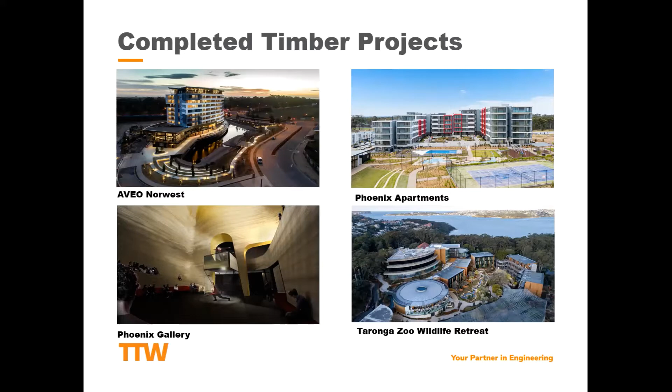So just today, I want to give you a bit of an overview of the building, and as Andrew said, just an introduction to the project itself. The people who worked on this building were myself, who did a lot of the day-to-day design, Raj, one of our senior engineers who also worked on it, and our director Kevin, who basically oversaw the building.

So this is what it looks like now. This was actually completed in 2019, basically last year. It's the second phase of a new development over in Rouse Hill, called Parkland Estate. The first stage was a townhouse development, and the final stage includes a new building called Lotus. We were engaged by Strongbuild as the D&C structural engineer for the project, originally brought on in 2015.

The project is located in Rouse Hill. For those of you who don't know Sydney, it's located to the northwest of the CBD, in a fairly rapidly developing area. The location is actually at the end of the new metro line, near Tallawong Station, for those of you aware. That's basically why it was constructed around there, to align with the new metro.

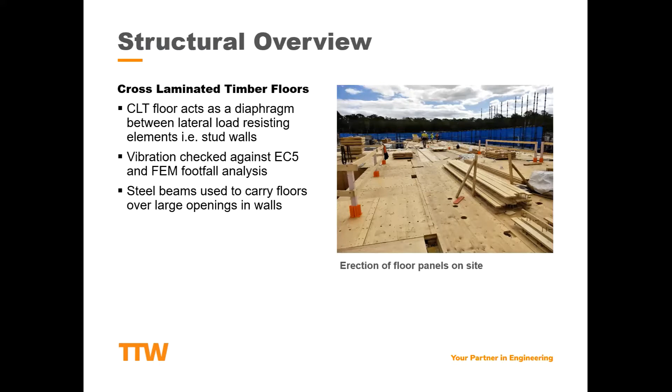So they consist of LVL stud, and the reason for this is to allow it to achieve a greater height than what you could construct out of MGP10. It also allowed us to basically pre-make all of the walls within the factory, and they would put a lot of the services in there. They then cover it with OSB or plywood, and then plasterboard line the whole thing to try and fire protect it. So once they brought it over to site, they could just basically sit it into place and move on to the next section, making it nice and quick and easy.

We use clusters of studs at the ends of the walls to carry concentrated loads, say over where there were lintels or steel beams for openings. The reason for this was just to try and make it as simple as possible, really, and to integrate that within the wall structure.

So as I mentioned, the walls were actually the main lateral load resisting element within this building. So obviously when you have a lateral force, you generate tension and compression loads within the ends of the wall. So we had grouped studs at each end to basically take out the compression force, and then the tension reaction was resolved using this proprietary tie-down rod system developed by Simpson Strong Tie.

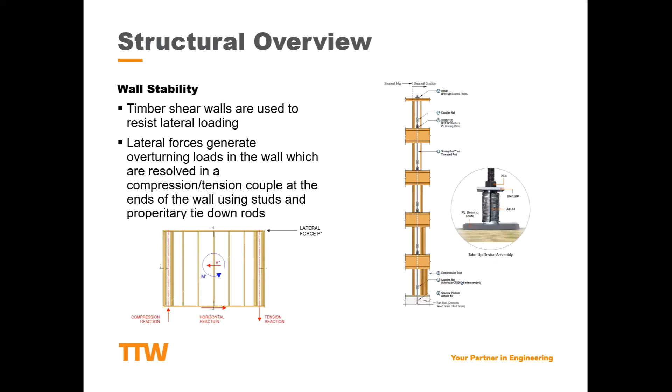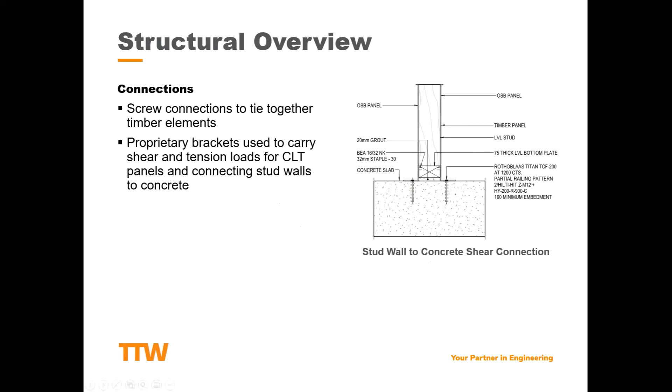There was obviously a lot of connections within this building to try and tie everything together. The connections consisted mostly of proprietary bracketry supplied by Rothoblaas, as well as a great deal of screws, which basically held everything together. We were using that to tie floors into walls and walls into other walls and so on. And then we had these shear brackets at the bottom of the walls to try and take out the shear load from lateral forces.

So when we designed the walls, obviously you have wind loading, so we had to check these stud walls for lateral deflection under service wind cases. And then under seismic, we had to ensure that there was enough ductility within the system to allow for our overstrength mechanism, so that our load hierarchy was actually properly fulfilled.

So what we actually did for this one is Strongbuild wanted to use a series of staples to build their walls. So we actually had some tests done by UNSW to verify the capacity of the walls as well as the ductility performance, which I'll touch on a little bit later.

The things we needed to consider, obviously it being a timber building, were durability. One of the major issues is termite damage, so a lot of the stud walls were actually treated internally to protect from that. They also covered it in plasterboard lining, which ensured it would be protected under a fire scenario as well.

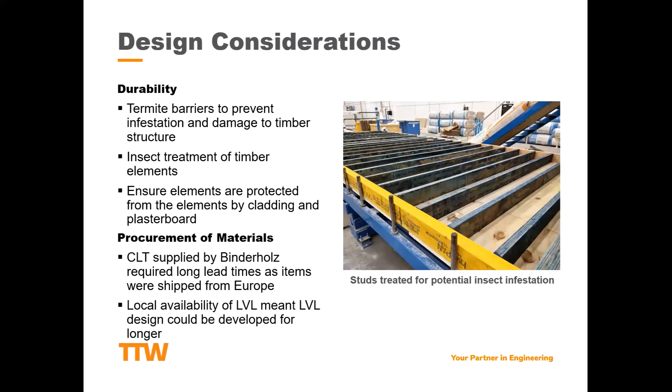For materials, the CLT was provided by Binderholz and came from Europe. This meant we needed to lock down the CLT design a lot earlier so it could be shop drawn and shipped out from Europe in time. The LVL was locally available, which meant we could take more time to refine the wall design and make sure it was as optimal as possible.

There were obviously buildability concerns. We tried to minimize the change in floor thicknesses, because this would simplify the detailing and junctions between floor panels. So we basically stuck to 3 sizes: 100, 160, and 180 thick floors. 100 was generally used within the corridors, 160 was used for most of the floors, and where we had higher loading or excessive spans, a thicker panel was used instead.

There were a lot of standard connections and lots of screws and bracketry, which were there just to simplify a lot of the on-site connections and make it as easy as possible to put together.

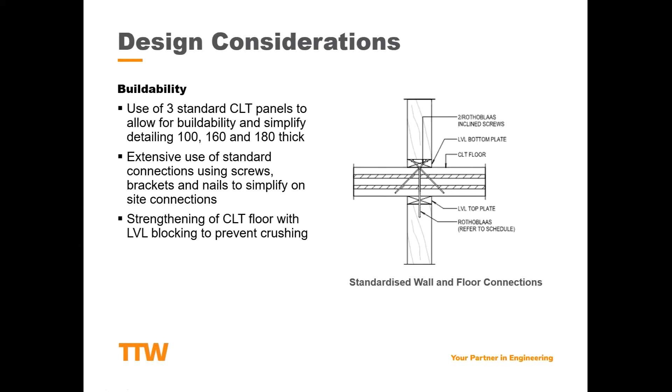Some areas where we had clusters of studs were a concern, because this is a platform construction, and the floor goes through the walls. There are issues where, with a huge amount of studs carrying say a steel beam at the end of a wall or a large opening, you might have a cluster of 3 or 4 studs sitting next to each other, creating a very large crushing force on the floor. So in some sections of the CLT floor we reinforced it by cutting a block out of the CLT and inserting an LVL piece, which I think Andrew will mention later had an influence on the axial movement.

As it was a panelized wall system, we had to allow for the manufacturing process, ensuring there's enough tolerance so that when building these in the factory, they can match what the machines are capable of in terms of staple placement tolerance and material thickness.

Because it was prefabricated, the panels could be pre-finished in the factory, meaning minimal on-site work—you don't need someone walking around on site erecting or stapling plasterboard. The other advantage was that they didn't need a lot of noggings in the wall, because the sheathing was already on the wall, providing stability for transportation and erection purposes.

We needed to inspect a lot of these walls, so we did many visits to the factory to make sure they were being manufactured properly—checking that staple spacing was correct, that staples weren't overdriven within the OSB itself, and just making sure everything came together properly with no strange surprises.

From a fire point of view, we considered AS 1720 Part 4, which addresses charring on cross sections. Generally, we used plasterboard to protect the timber stud walls under a fire scenario, with 2 layers on each side of every stud wall to protect it for the full 90-minute duration. For the CLT, we also used plasterboard in a tested system done by CSIRO, combining plasterboard lining and charring to achieve the full 90-minute duration.

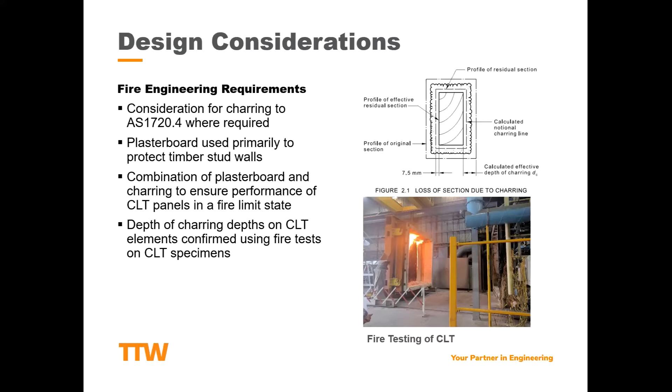So for axial shortening, which is what Andrew will mostly be talking about, we had to determine things like the facade gaps and, when they installed services, that there wasn't too much differential movement between everything, making sure we weren't going to cause issues with the facade because the building has started to move and the gaps in the facade are not capable of tolerating that kind of movement.

We generally left a bit of space at the top and bottom of the walls to prevent the OSB from shortening and being loaded up directly when you stick the CLT on top. That's because when we place the OSB and plywood onto the wall in the factory, there's no load onto the wall. So when we then load up the wall on site, we don't want a situation where the plywood is potentially taking some of that vertical load.

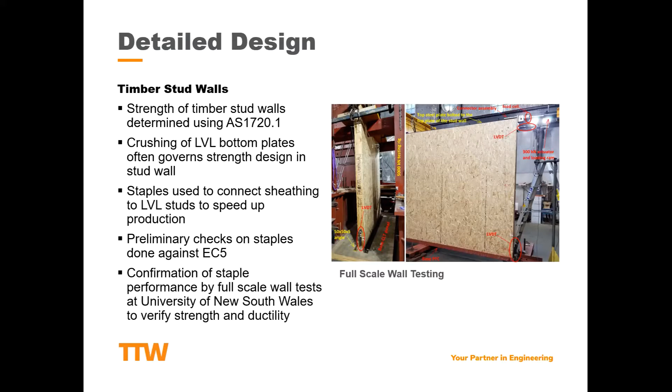So we did some prelim checks on the staples against Eurocode 5, and then the capacity of the staples was confirmed by full-scale wall testing done by the University of New South Wales, just to verify the strength and ductility assumptions we had made, to ensure that when we were allowing our seismic loads to be reduced assuming ductility, the system actually had the ductility we were assuming, and we weren't potentially under-designing things.

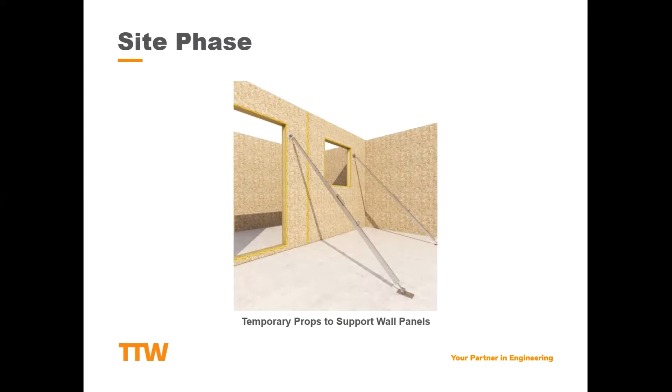So from the site phase, things were sort of straightforward. A lot of the floors and walls came to site pretty much all pre-done, prefabbed. They had temporary props to support the walls until they got the next floor on, and then obviously they take those props, put them onto the next floor, and just cycle them through each floor.

So one of the main things we learnt throughout this process was just making sure that we allow for manufacturing needs early in the design approach. This was things like standardizing the stud wall sizing, so that when they're trying to build a wall, they're not having to pick lots of different studs out of a lineup. So trying to simplify everything and make it as uniform as possible, and also allowing for consideration of manufacturing tolerances, so that if there are issues with installing studs and so on, we don't have problems there.

The edge distance requirements for the sheathing, so the OSB and the plywood, was critical. We had to make sure the plates were thick enough, and that when they installed the staples there was enough edge distance for that to still work. What we found generally was that it was more practical to utilize more material to get better, more practical details, and this actually led to a better design approach.

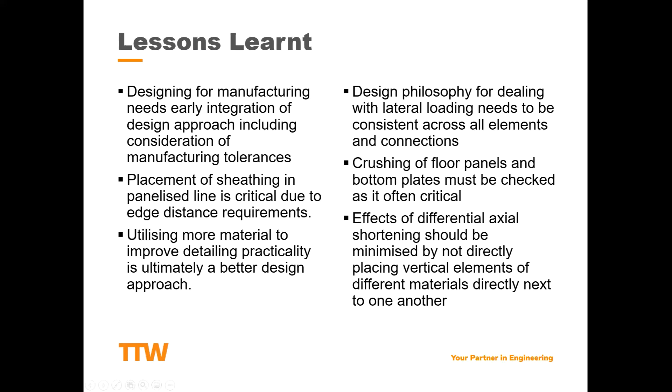So that's pretty much everything from my end. So Andrew, if you want to take back over and start your bit.

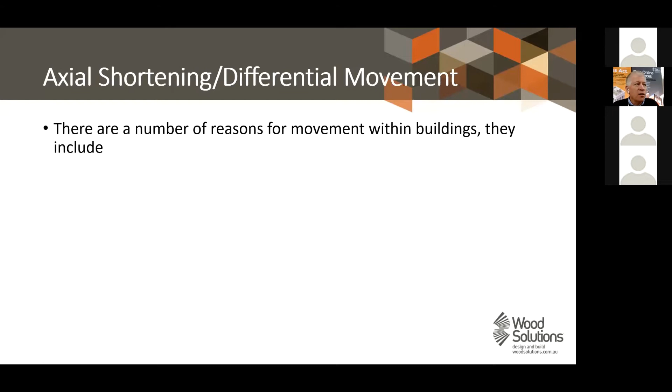So why did we monitor a building? There's a number of reasons, and the main one is what Simi's already alluded to, that the axial shortening differential movement was a key consideration, and as you saw, it was to govern the sizing of elements in the building. So what causes movement within buildings?

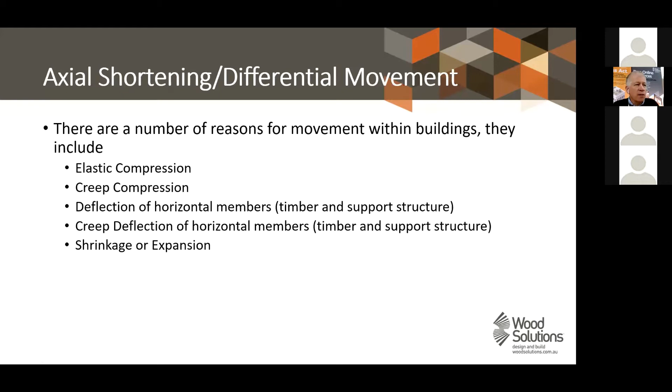There's elastic compression, creep compression, deflection of horizontal members, both the timber and support structure, and creep deflection of those horizontal members, again timber and support structure, and shrinkage and expansion. So as engineers, we need to get an understanding of how much that occurs.

Just a reminder, this is just a common thing for all building materials. Most of those actions, other than probably shrinkage, is common to all building materials. So for timber systems used in mid-rise buildings, this is a relatively new concept in Australia.

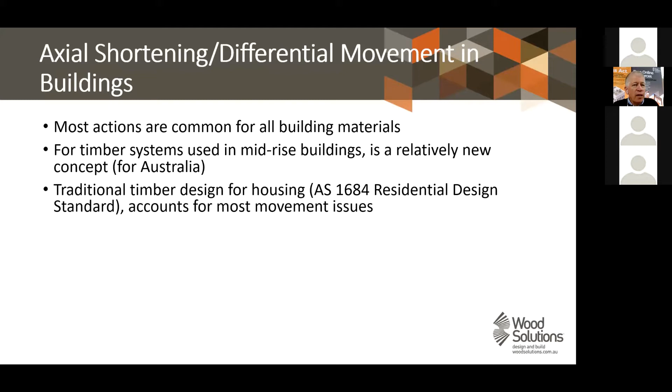Traditionally, timber design for houses, which is governed by the Australian Standards AS 1684, most of those things are accounted for within the code. But mid-rise timber buildings, particularly timber frame, is nothing new.

It's been used in North America and Europe for a long period of time, and they've generally got around these issues. But for Australia, our climatic conditions and timber species are different, and it was a bit of a consideration - are we going to get the same type of results?

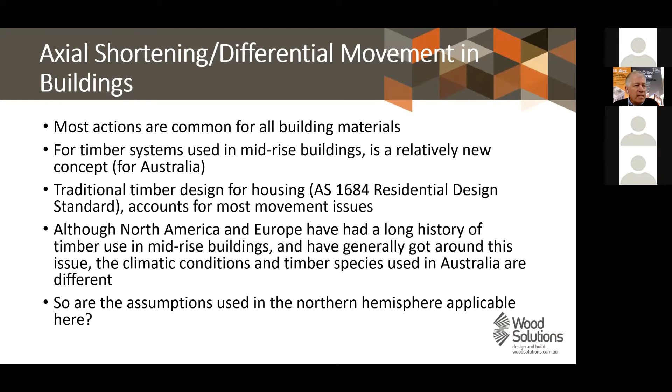So what we're trying to do is probably validate some of the assumptions that the Northern Hemisphere would use and see if it's applicable here. And to also input into wood solutions guide number 50, which is a mid-rise timber building structural engineers guide. And in that guide, there was a need to make some assumptions.

So we have calculation methods, which I'll talk about very shortly, and there's obviously assumptions that go with it. These calculations rely on assumptions that were relatively untested in the Australian context, and that was the reason why we needed to get some real data against this.

So settlement of building components - there's quite common things such as closure of joints, and there's a picture of an overseas building here, and you can see there's quite loose gaps between the elements, and when you just imagine you put more load in the building, they'll close up.

Also the deflection of the support structure. In this case, is the actual project at Rouse Hill, and you can just imagine there's a fair bit of gaps because of the deflection in the concrete slab.

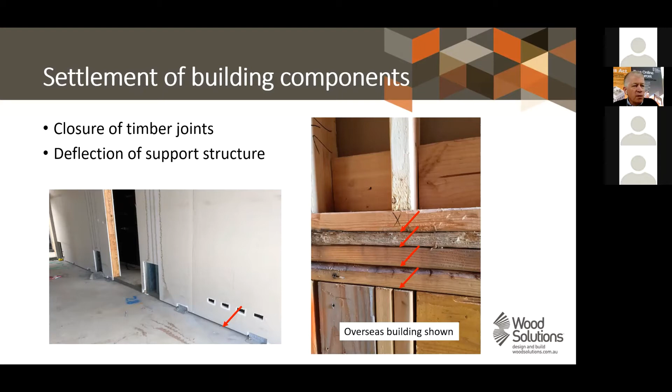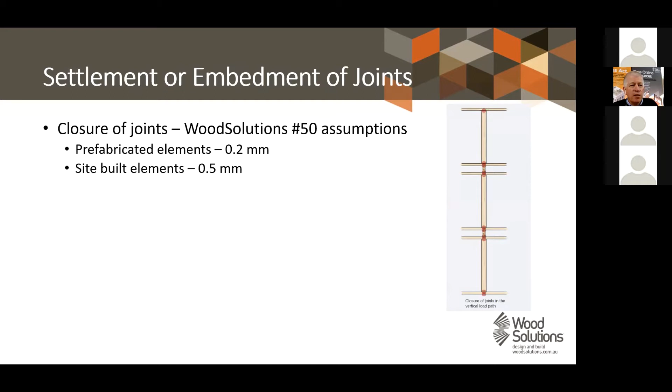So in the wood solution guides, we assume for prefabricated elements 0.2 millimeters, and for site built elements 0.5. And you can see on the picture on your right, there's a number of opportunities for gaps to occur in timber frame buildings, and imagine this over 6 stories. So you add those up.

So there's an equation there in the guide, and I won't go into detail what that is. But just to remind you that the substructure, you calculate it for its normal calculation means, but remember they generally have greater spans and therefore more deflection, and there's also creep.

So you can account for some of that deflection by packing the underside with grout between the wall and the slab, but you'll get creep occurring as well.

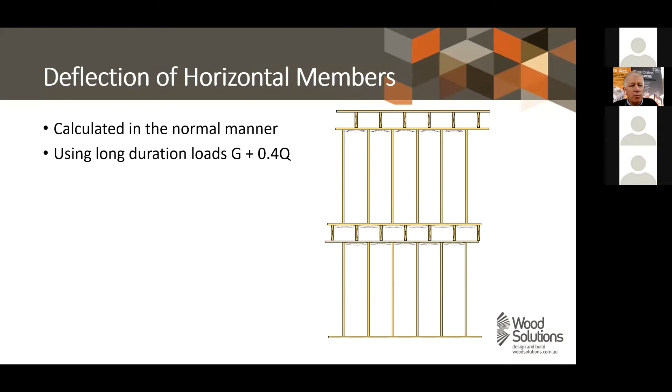So calculation of timber deflection in horizontal elements, pretty much normal manner here, just using the appropriate load case. So they can be reduced by aligning studs in the wall frame, so they transfer through, so there isn't any parts to deflect, or use a whole type of framing technique called balloon framing.

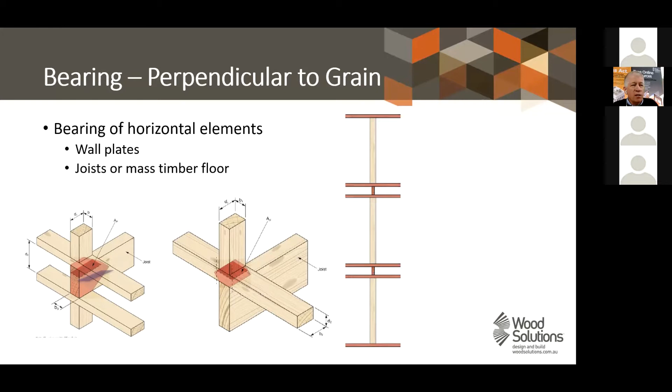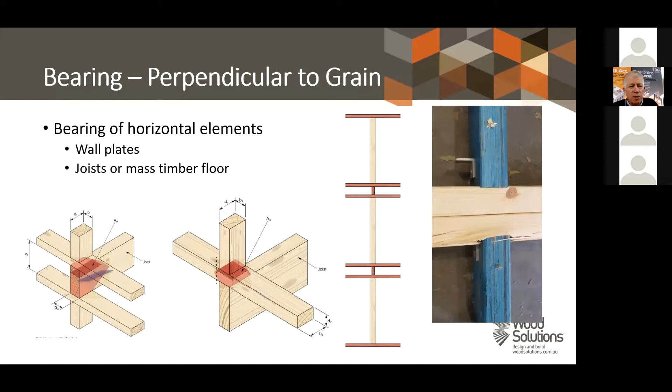Another presentation we'll talk about perpendicular grain type issues. And here's what could happen, and this is a loaded test which was used to investigate bearing type of issues with timber frame, and this is pretty much like what was done in the building, a plate with LVL studs.

There is a method contained in a report that TDA did, which is available from Wood Solution, available from Forest and Wood Products Australia's website, and it talks about the bearing capacity of common Australian imported timber species. It gives a better way of estimating the perpendicular to grain MOE.

Just a reminder that the bearing check you have in 1720 Part 1 is a pass-fail criteria, and this issue is more of a serviceability issue. So be wary that 1720 is not going to give you an idea of how much movement is occurring in the building.

Compression of vertical elements, obviously studs - there's obviously a bit there, but you can just imagine there's not going to be that much for it. The other area where it's going to be mainly seen is in the shrinkage of the vertical elements.

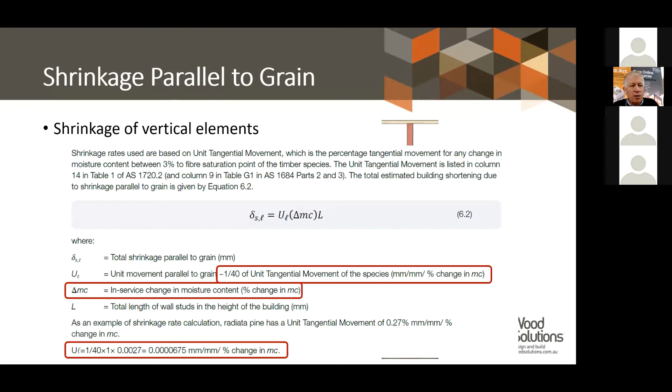Again, it's fully along the grain. It's 1/40th of the tangential movement for the species, and it changes for in-service moisture content, which we'll talk about more later. You can see it's a very small number when it comes to timber along the grain. Not so with shrinkage horizontal to the grain.

That's why you might hear us, from time to time, talk about taking out the horizontal elements out of your building or load path, and having them bearing vertical on top of each other as a better solution for these sort of buildings. It reduces the amount of movement that's going to occur.

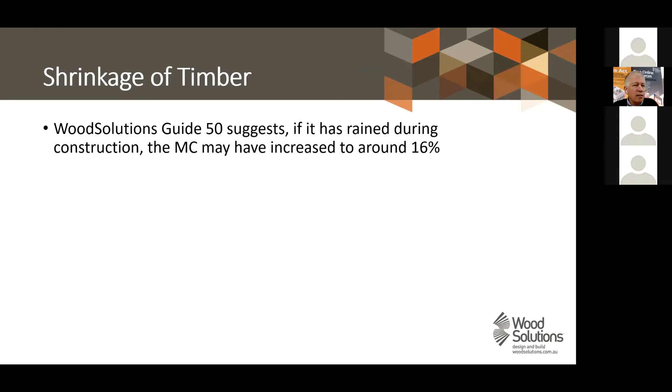So the WoodSolutions Guide 50 has a number of suggestions. It suggests that during rain during construction, which always happens, the MC of your timber may change from the target EMC - I'll talk about what that is later - to about 16%.

But note that's for sawn timber size elements, but not so for mass timber. There will be a moisture gradient through the mass timber from the surface of the outside lamination to the centre. So just think about this.

This is from Swedish Wood - nice illustrations. Your surface moisture content might be 7%, but the centre may be 21%, and we really talk about it as an average. So just be wary that there is a change, and we'll talk a little bit more about where we measured in this building.

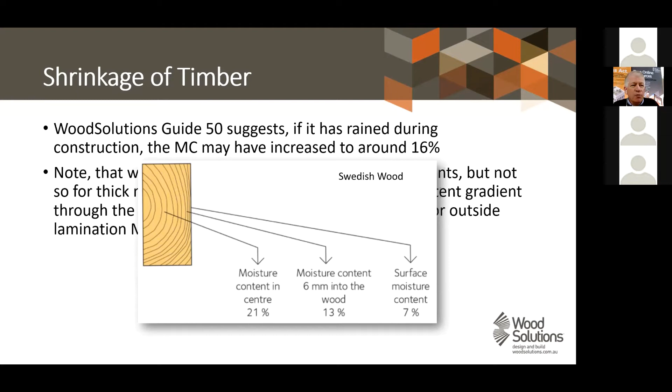So equilibrium moisture content - just a reminder and a heads up, it's a CPD question. Equilibrium moisture content, EMC, is the moisture content at which the timber neither loses nor gains moisture from the surrounding atmosphere - the Goldilocks condition.

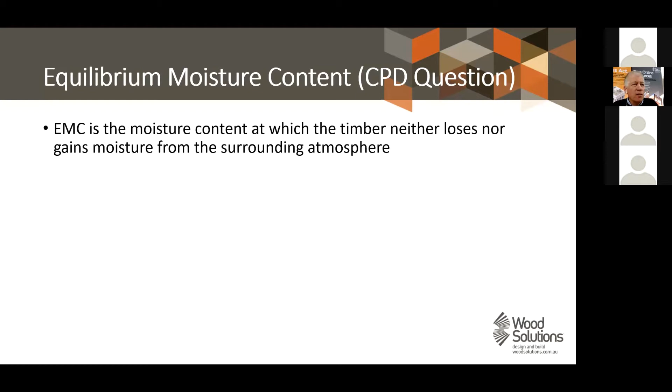Generally for major Australian cities, we assume an EMC of about 12%. But this EMC may be lower if we use AC or heating for extended periods of time, or the building is located in a drier region of Australia.

Therefore we're assuming a 4% moisture content change - is this correct? And remember, we have other issues such as creep, so we use a J2 factor of 2, so creep doubles deflection and compression estimates. So we've ticked through the major ones that cause movement within timber buildings.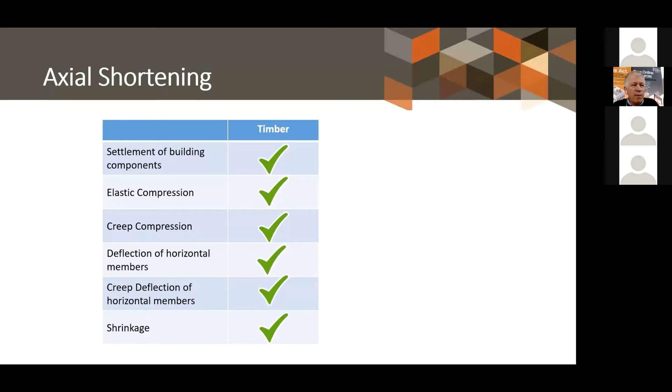We're just seeing whether the assumptions in the Wood Solution Guide 50 actually bear out. But also a reminder, there are other reasons that cause axial shortening of movement, for example using acoustic strips, such as shown in this image of a CLT building. They will compress, and those dimensions should also be included.

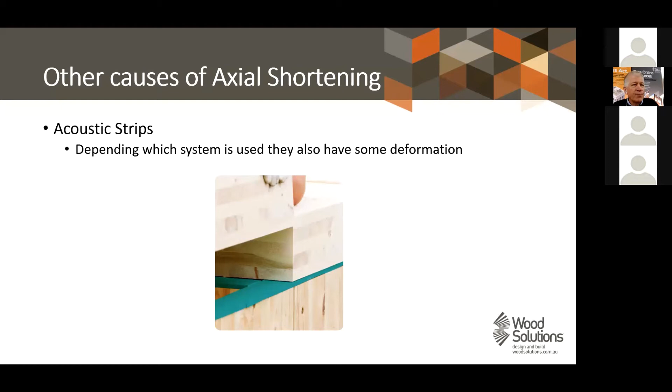So in summary: mid-rise timber buildings are relatively new. Climate and timber species are different to international experience. Assumptions used within Wood Solution Guides are based on best practice international experience.

Just to remind you again, it's a moisture content change from 16 to 12%, and the design assumption that each story will move around about 6 millimetres, 1/4 of an inch. That's showing where it's come from.

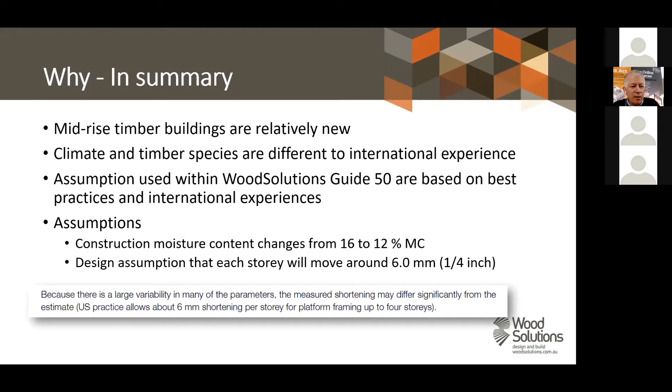So it's a US practice, and it's something for the engineers out there. When you do calculations in this area, it's not a bad thing to include these assumptions on your design drawings. If you assume 6 millimetres of movement per story, it'd be good to note it on the structural drawings, so your follow-on trades know they should allow for that type of movement within plumbing and other bits and pieces that may suffer from some form of movement.

So what we're doing is validating key assumptions used within this Wood Solutions Guide. So how much movement really occurred?

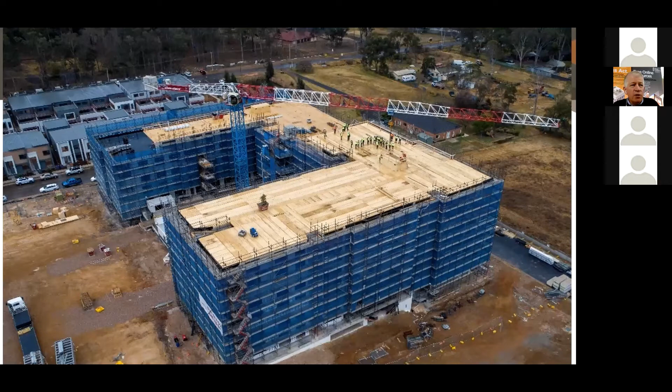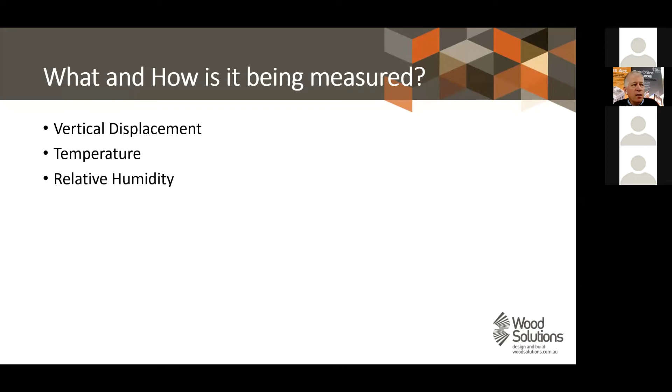So what and how is the building being measured? We're measuring vertical displacement, temperature, relative humidity, and moisture content.

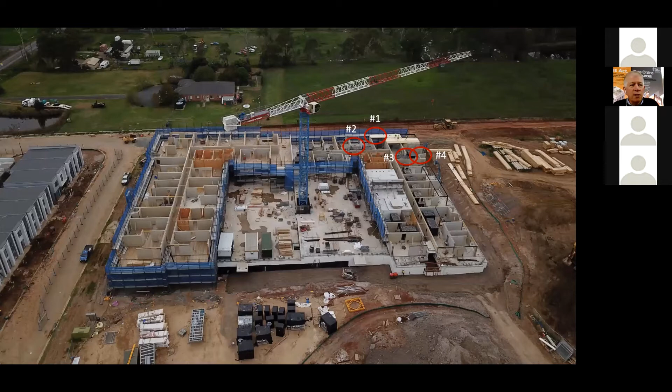So we measured that as a slice through the building. Each one of those points, we measured that across 6 stories. This point of the building is where the building was 6 stories high.

So sensor and data logger are used. We purchased this online from Structure Monitoring Technology from Vancouver, Canada.

So why do we purchase this type of stuff from overseas? Because they have off-the-shelf systems, and they can help with monitoring, and they've actually had a number of buildings using their technology. So we're just borrowing from their experience and applying it to Australia. It was really easy because they've done all the hard work, and we just purchase the equipment and install it. They had cloud-based software that allowed us to analyze it via the internet, which made it really easy.

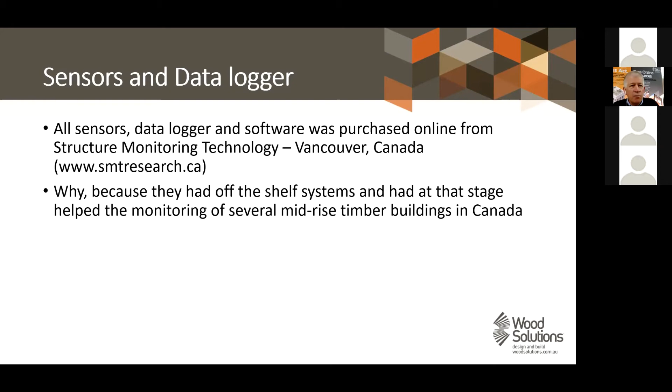So they have done a number of buildings. If you go to their website, you'll see some reports on some of the buildings that have been measured in Canada. It's a good experience to compare how our results have gone versus theirs.

So for vertical displacement, we use a thing called string pots. The string pots are nothing more than a wire which connects from each floor above to the floor below, and they've leapfrogged up the building - so 6 stories with 6 of these string pots, and the potentiometer which measures the resistance. As the building moves, a circular dial moves, and that is calibrated back to movement.

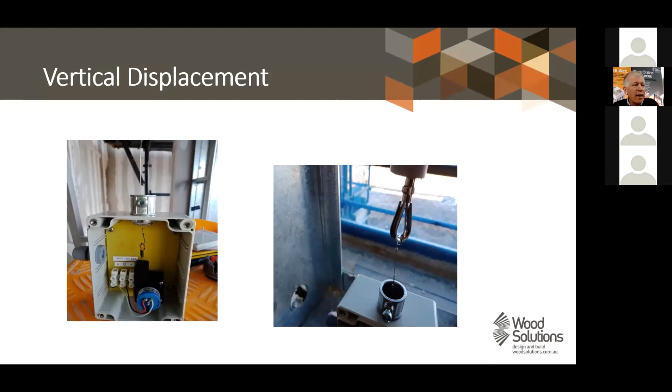We use a high technology here - a tracer line for fishing hook, which was used to connect it because it did not elongate compared to using a weaker wire.

So these were installed into a tube or a conduit, and the conduit was designed so it allowed movement. It was an oversized conduit on top of the central main conduit.

The reason for that, as you see here in the picture, is that there's obviously insulation and other things that are going to go in the wall, and we didn't want to interfere, or the wire to be interfered with by other things that may appear in the wall. Also, we were penetrating the floor, and we needed to have a penetration seal there as well.

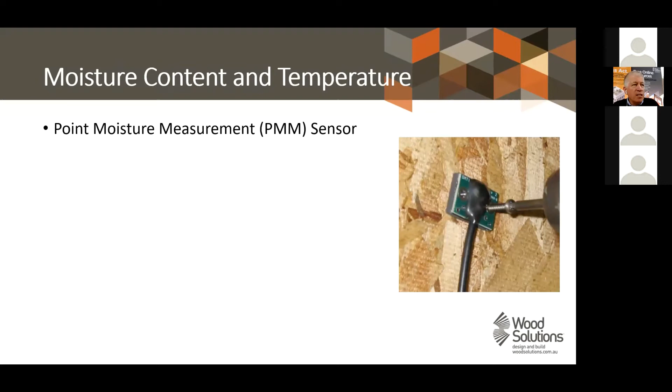Moisture content and temperature were measured by the usual pin sensor - point moisture measurements. It's nothing more than gauging electrical resistance of timber between screws, and temperature was also measured as a means to correct for species moisture content, automatically done by the system software.

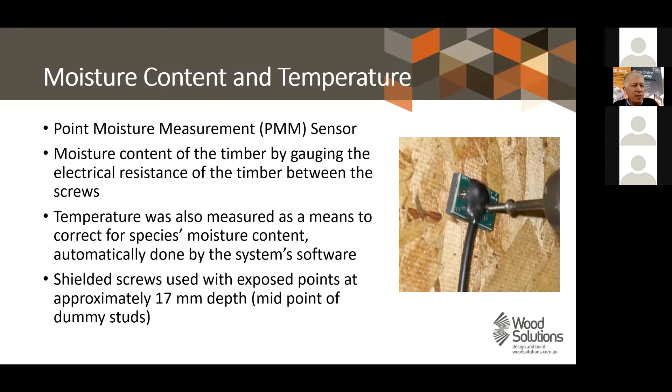We used shielded screw exposed points, 17 millimeters deep, at a midpoint into a dummy stud. We used a dummy stud because the structural timber framing couldn't be measured - it was prefabricated and enclosed when delivered to site, and the rest of the partition walls and external walls were steel framing.

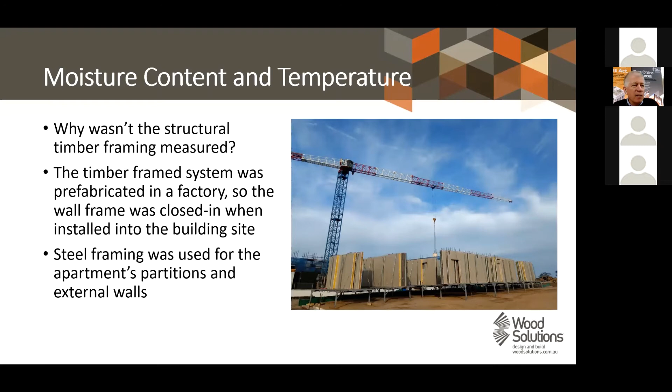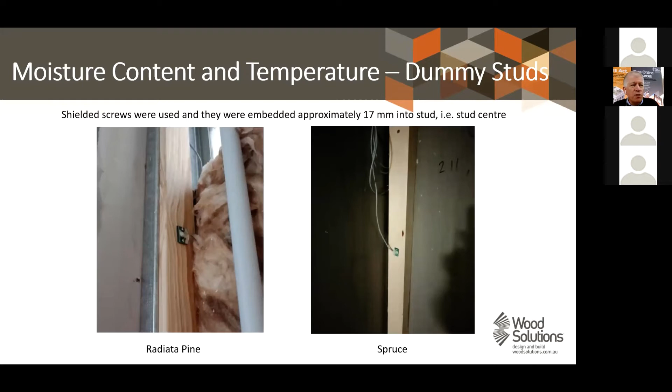So we placed the dummy stud into the steel framing elements and measured that - it's nothing more than a piece of radiata, 70 by 35, and we also occasionally used spruce to see if there's a difference between the two species. We'll talk about that later.

We sealed the ends of it just to ensure there wasn't any moisture leakage through the ends of the roughly 1.5 metre long dummy stud. We also measured the CLT floor, put through to the first laminate, midpoint of the first laminate, and that was measured in these locations.

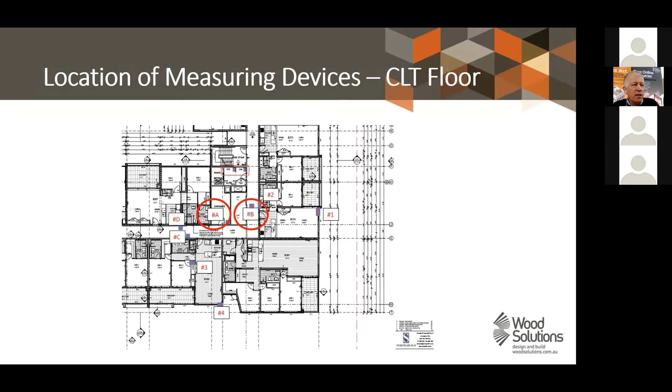Humidity was also measured, and all of this data was collected via sensors that were hardwired back to data loggers, and from the data logger, which was contained in the garbage room, they were connected by Wi-Fi to the big.

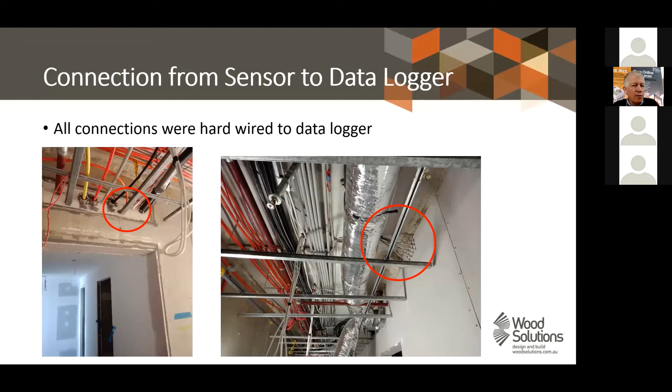And from the data logger to the laptop, which was called a big, it was Wi-Fi connected, and we had to put Wi-Fi antennas throughout the building just to make sure they picked it up.

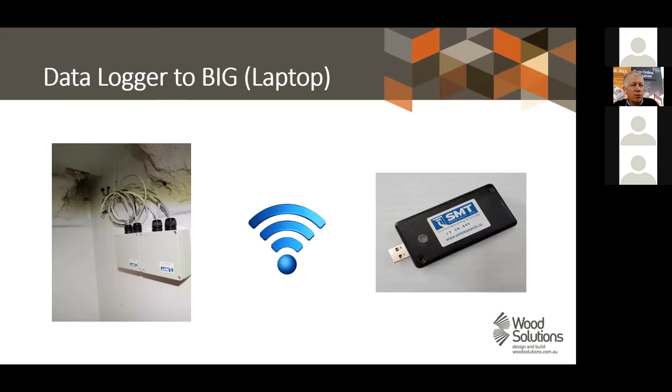The big building intelligence gateway was nothing more than a laptop, which then connected - this is a bit of a plan of the wiring of the building - connected to the web, which then allowed the analytical software to calculate the results.

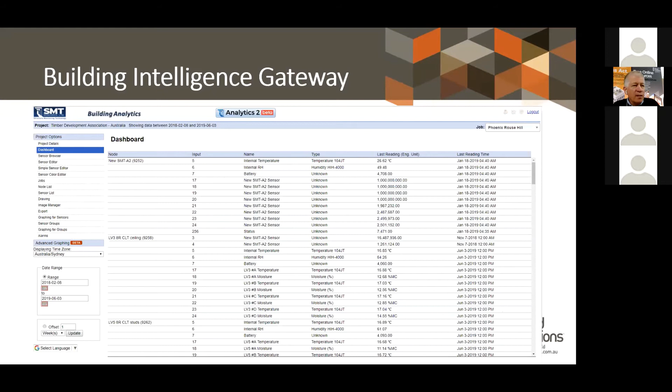This is what the platform looks like from the website, and you can see the number of sensors we have, and this is the type of output we get, which is these squiggly, coloured lines.

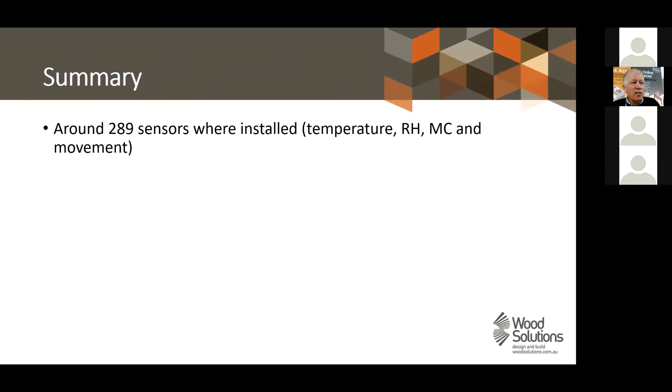So we had 289 sensors installed, all wired to the data logger, which connects to the laptop via Wi-Fi and then onto the internet-based software.

So what were the results? We look at the data collection. The first sensors went into commission in October 2018, and the first report was made in June 2019.

The last data collection was about April 2020, but sensors were dying from early 2020 as the batteries were dying, and unfortunately this occurred mainly during the COVID period, so we couldn't do anything about it - we were prevented from going in to try to change the batteries.

But this is the type of output we get, and this is a temperature reading on the exterior east-facing wall, 3 stories. Here we have a couple of gaps in information where the collection of data didn't occur.

You occasionally get that. This period up to about June 2019 was the construction phase, and this is the handover and potential occupation period.

We're not quite sure if the particular locations were occupied - some were and some weren't, and sometimes the data goes out to indicate that, and this indicated the number of stories.

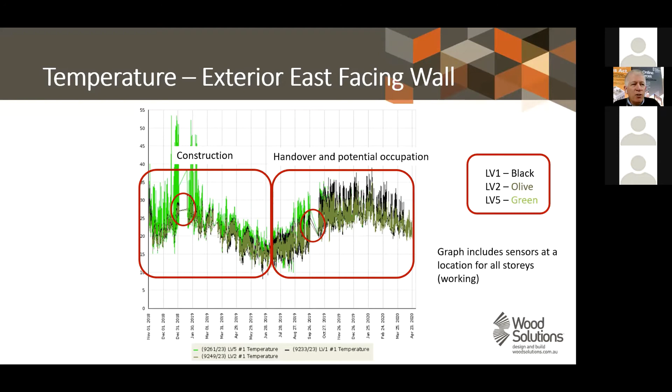So if we look at the key to the side of this, it's fairly consistent throughout the rest of the graphs going to show you - it'll give you more colour on what represents a story.

So the temperature on the exterior east-facing wall, you can see it's pretty consistent. I haven't individually shown you the temperature in the report, which will be available from Forest and Wood Products Australia. You can see they're fairly consistent and changing through the seasons, with maximum temperatures to minimum temperatures cycling through the year.

This is a bit of noise that occasionally occurred - you get to pick up a bit of this when they power up the building, so a bit of stray electrical current somewhere tends to upset the sensors.

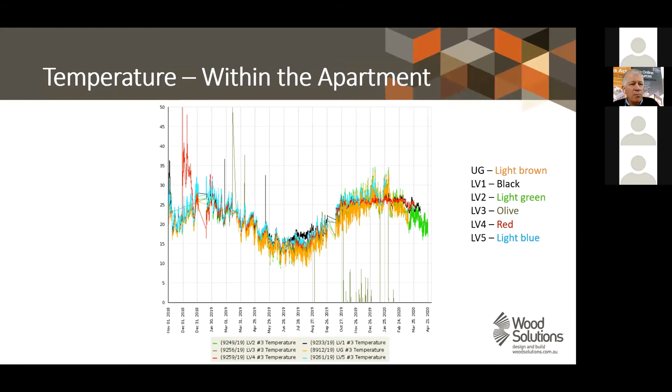But temperature near the corridors again follows a pretty similar pattern to the other sensors, and also within the apartment - so they were measured, and this just shows more of how they're cycling through, pretty much the same.

And you compare it against the BOM data, the meteorology data. You can see that for this period of time, the maximum and minimum for the outside temperature - we had a 50 degree temperature variation between the maximum and minimum.

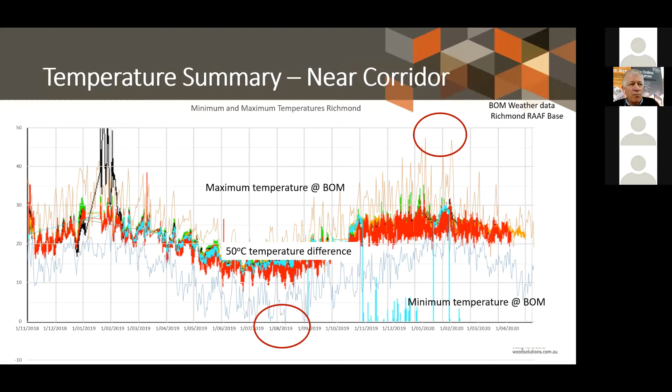So it was below 0 and almost 50 degrees measured at certain times, but you can see that the temperature within the apartments was fairly regulated and wasn't getting those peaks.

And again, looking at the external wall - so relative humidity is a very key indicator, particularly when it comes to moisture content, and you can see here it's changing through it.

We get fairly large relative humidity during the early stages, but you can see it's fairly consistent, varying from around about 60, averaging around about 60%.

And we found that it was drier in the interior of the building than it was on the outside, which kind of makes sense - it's picking up a bit of moisture from the outside of the building while the interior is not.

So looking at the construction side, it's obviously wetter - so high relative humidity during construction compared to the handover and occupation of the building.

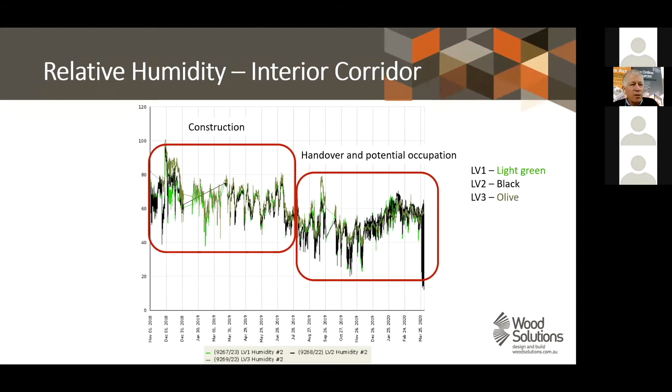And we look at the interior of the apartment - you can see here there are some low numbers there, and that probably represents the apartment wasn't occupied.

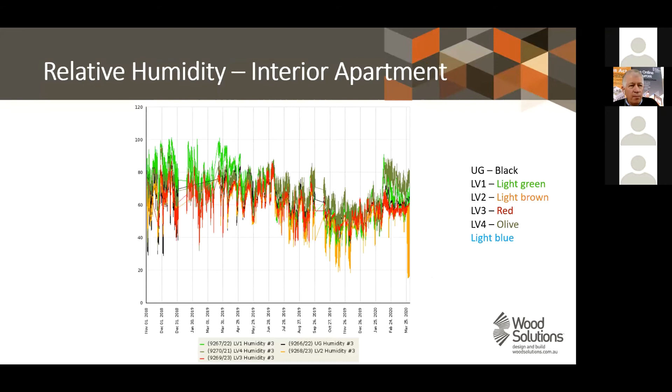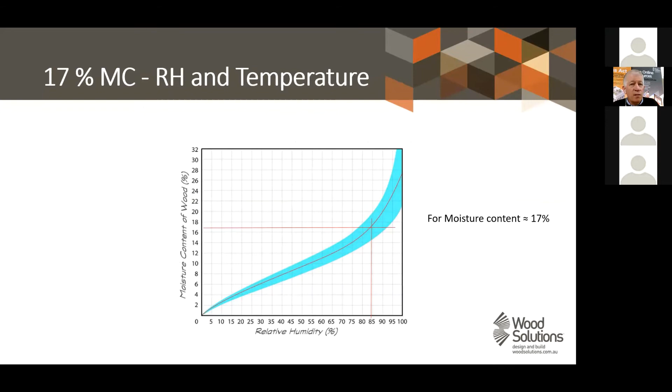The moisture content of the dummy studs showed relative humidity was only 55%, and temperature between 20 and 30 degrees. That really should have been around 8 to 10%. So I'm not quite sure exactly what was happening there, but we had a closer look and found that the battery was dying in that period of time. So some of the later data is corrupted by the battery not working as well, and it tended to jump up in certain places, so be wary of that.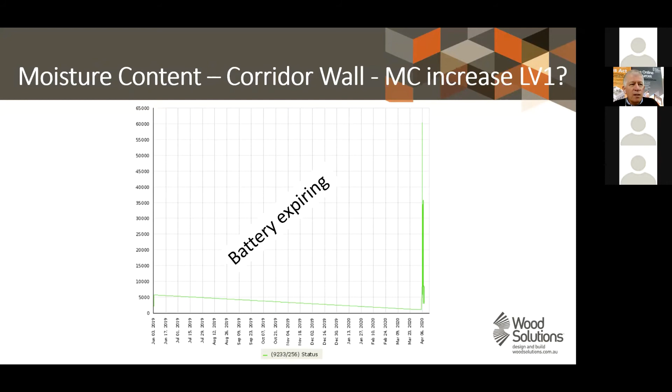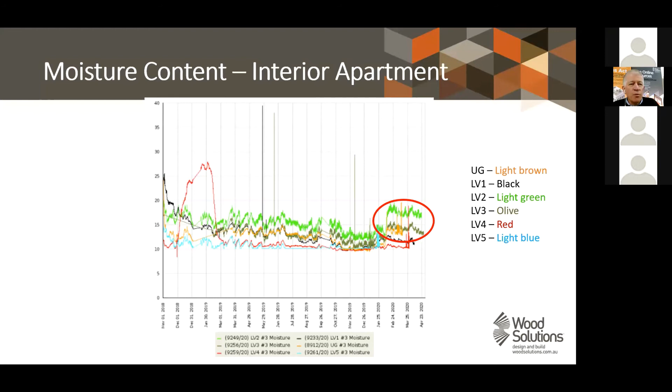You can see here we've got some noise for another interior apartment towards the end, caused by the battery dying. You can see we're getting down to 9-10% in moisture content, but it can go up as high as 15%, with changes from construction through to occupation. Again, flicking through that, moisture content is around 8 to 10%. So it wasn't an error in the reading of the meter in that particular area - again, the battery expired.

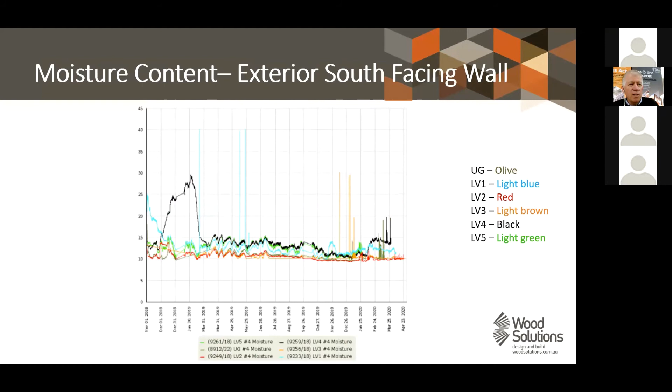So moisture content of the east facing wall was pretty consistent, and the south got similar results. Again a bit of noise towards the end, but it's good to see that they were fairly consistent throughout.

We also had the moisture content of the CLT floor. The light brown one was a bit lower, and the reason being it's the 5th floor - well, that's actually the roof. So the roof panel was noticeably drier, and that makes sense because it's picking up a bit of heat from above and drying it out. So it's quite considerably different compared to the floors lower down.

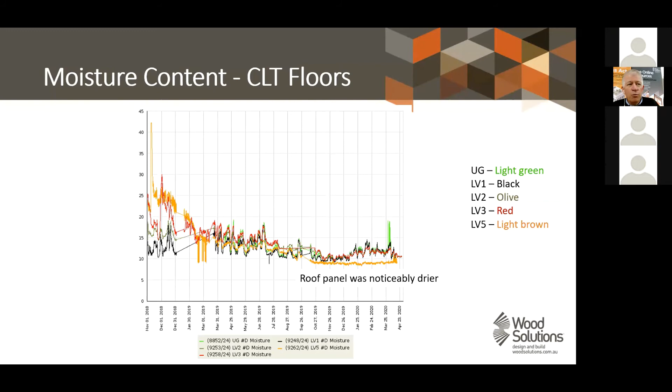One of the interesting things was looking at the difference between radiata and spruce. The black line represents radiata, and the green line is spruce, and you can see there's a lag a little bit between spruce and radiata, but they pretty much follow the same changes in moisture content.

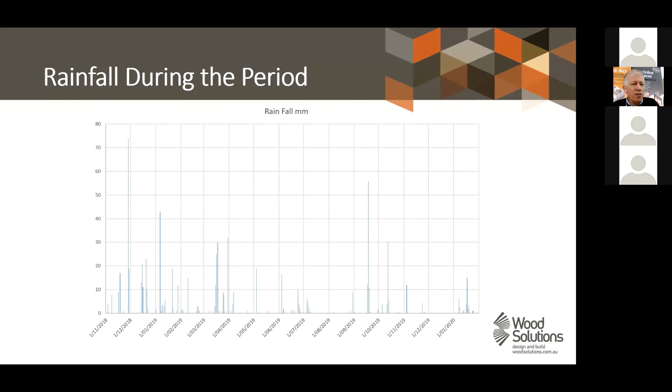We look at the rainfall period - we can see rain occurred over that period of time, and we overlay that with the moisture content of radiata pine. It's a bit hard to overlay these two graphs, but you can see there's a spike occurring with the moisture content, for example there - this is a very large rainstorm, almost 75 millimetres of rain occurred in a couple of hours in Sydney. You can see there was a major spike occurring.

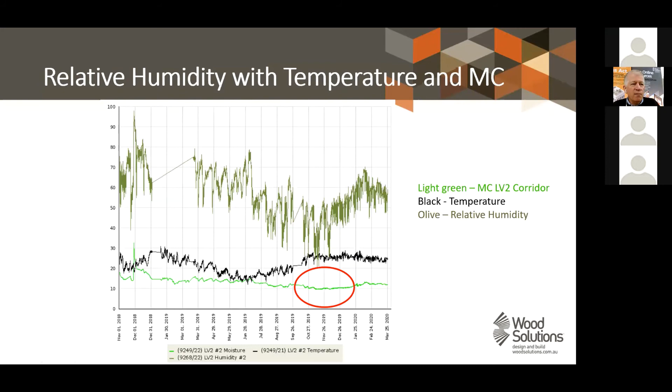Looking at comparing the relative humidity, the temperature, and the moisture content, you can see here that we got a drying at 50% relative humidity with the temperature, and that resulted in a lowering of moisture content. So we can see that common sense is occurring in the data - the measurements are pointing to what the actual data is.

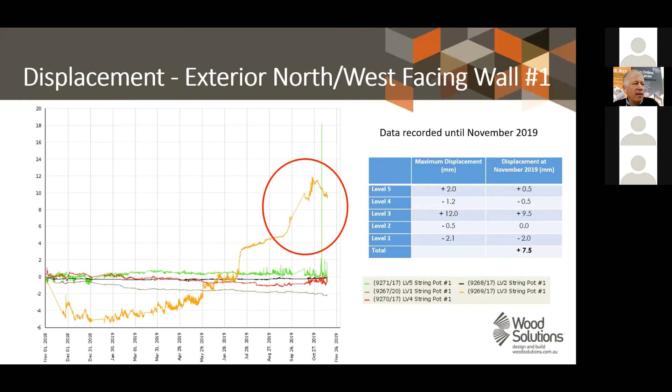More interesting is what is happening in the displacement. Here's the displacement measured in the exterior wall for the northwest facing one, pretty much unchanged for most of it, bar one. In this case, we were a little bit concerned about what was happening here because it was a 10 millimetre movement while the other parts weren't moving at all.

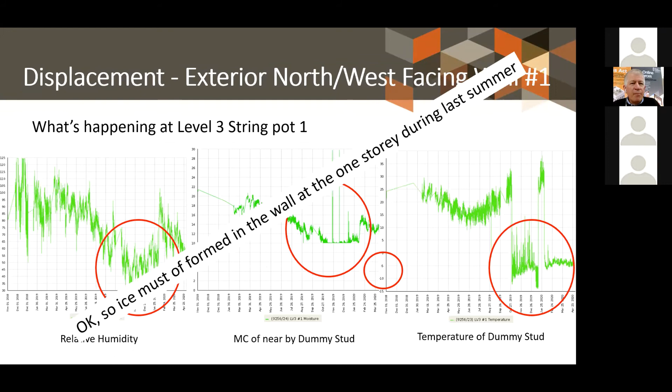So we didn't think that ice was forming in the wall one story during summer, so there's something going wrong in the data at that point in time. So we'd be wary that the movement wasn't occurring as expected. It happens occasionally that these things don't measure correctly.

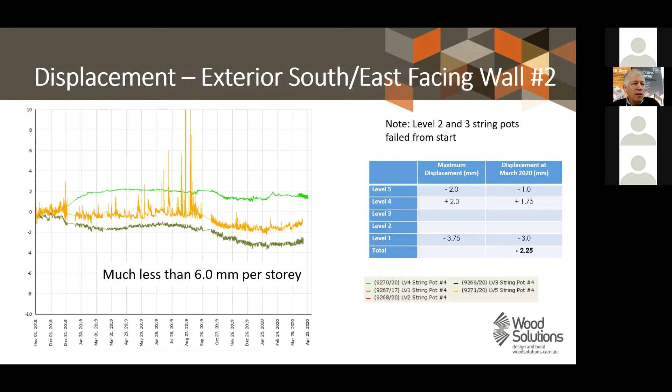Displacement exterior wall, southeast facing wall, we find again it's not moving very much. We measured at the last point -2.25 millimetres, and the table contains the maximum movement, so not really much at all, much less than the 6 millimetres we expected per story.

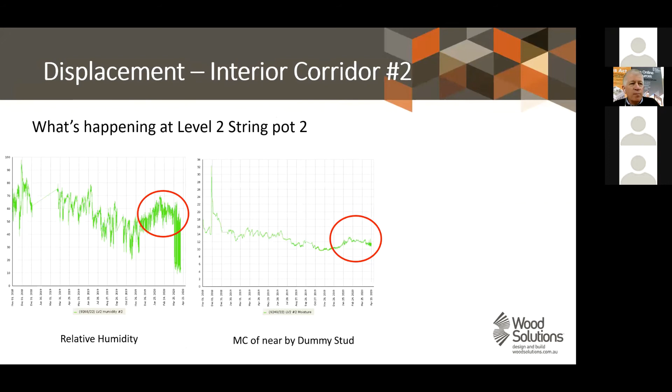Again, be wary of the data towards the end, because you can see here with that particular string pot, the relative humidity got a little bit crazy.

One of the things Samir also alluded to is that some of our data may be a bit strange because we had these blocks, which he described before, transferring the load from the stud walls onto the lower stud walls. That took out the effects of the floors, and they occurred at random spots, mainly on the lower stories, and sometimes influenced our readings and other times didn't. So it's a note to self to look at where the location of those blocks are against where our measurements were occurring.

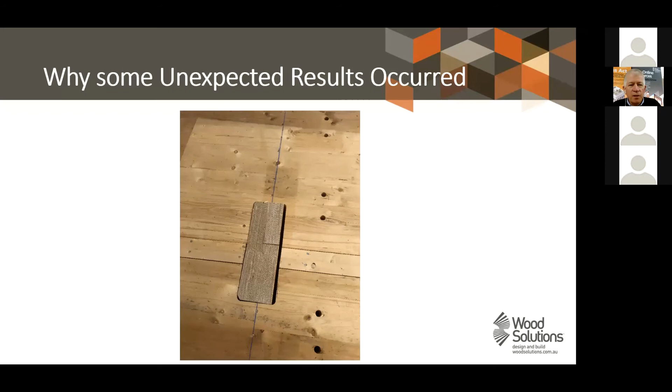So summarising, the moisture content change — our estimate was 16 to 12%. We didn't actually find that. We found that once the building was enclosed, it was around 16%, and we could say that's true. While it was exposed, getting direct rain on it, that's where you're getting a high moisture content. So when it's protected, this is what we find occurring.

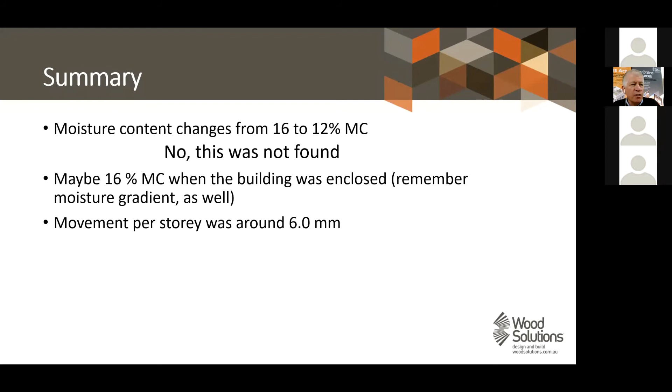Remembering that there's a moisture gradient occurring, which is something we need to address in our wood solutions guide, particularly for mass timber. Movement per story around 6 millimetres are suggested from North American experience, but we found that was a very conservative estimate, and it was much less — around 2 to 3 millimetres per story was probably more the average, which shows it was a well-designed building, and congratulations to TTW for a well-designed project.

Okay, so we're now at question time. We'll take questions — there are 14 questions, and I'll start from the very beginning.

The first question from Scott: can you please repost the questions for the CPD? Yes, they will be done towards the end.

Denise, did you also monitor the relative humidity in the instrumented wall cavities? The short answer is no, that wasn't done. It was done at those locations only.

And I'll get a question soon — take time to explain the CPD questions. All right, we'll do that one when we go through the CPD questions shortly.

How is the rain during construction handled in relationship to the CLT floor? Samid, you saw the building under construction more than I did — would you like to jump in and answer that question?

Yeah, sure. Generally speaking, Strongbuild found from some of the construction experience over in Europe that they didn't really tend to do very much during heavy rain. Sometimes they would cover it in tarp, but there were occasions where they didn't. It really depended on the type and duration of the rain. But generally speaking, they basically just left it out there. I think they got advice from the manufacturer that if it's just for a day or so of weather, it's not a major issue — they'd just usually let it dry out before they screeded over it.